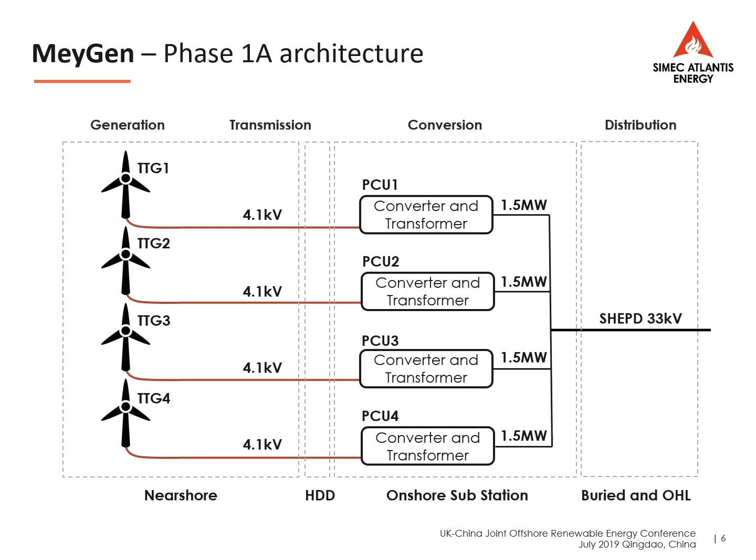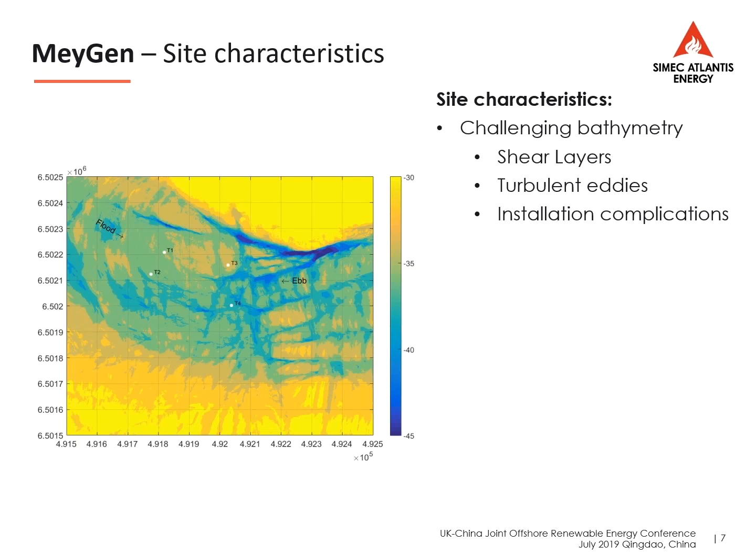The site characteristics are what they are. It's not the shallowest of sites. It's not the deepest of sites. We're in about 35, 40 meters. As you can see from that drawing on the screen there, the site topography is not just one nice flat sheet of rock, and so that certainly gave us challenges, but also challenges that have helped us develop ways of improving costs of all our equipment.

A better picture of the site really shows you. I think this one on the slide you can see now is nice for me to see, because we've had a lot of experience with cables out there. When we started this, there was a lot of talk in the industry around cable stability.

And obviously most tidal sites in the world are founded on rock or very stiff ground, because anything that's fairly loose gets scoured away. So therefore the traditional methods for wind farms and other cable laying, where you would trench cables, is not impossible, but certainly economically difficult.

And so what we've learned at MeyGen, we spent a significant amount of money on modelling drag forces, turbulent eddies, all that sort of stuff. At the end of the day, the lesson's always the same, that doing equals a lot more than modelling.

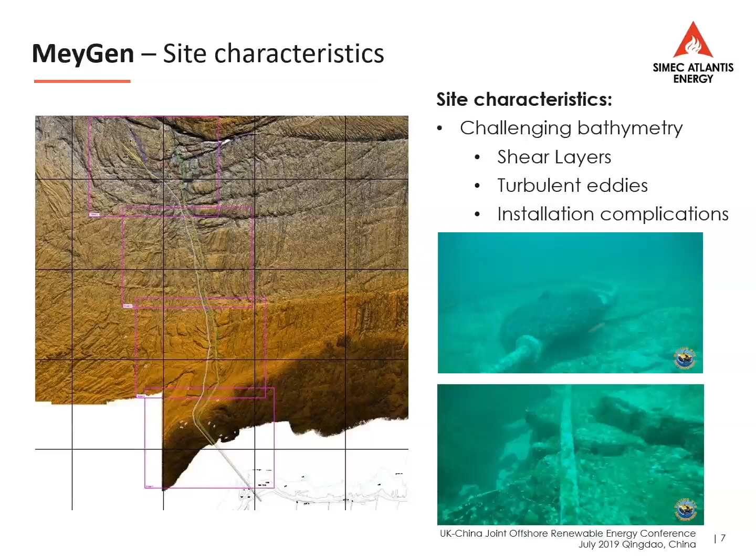You can't do it without modelling, of course, but by going out there and laying these cables, and particularly with the turbines that have cable tails, the Hammerfest turbines, we've learned what cables like to do and don't like to do out there, and some of the things we used to worry about that were major cost drivers in our models are not anymore, and that's great news. Happy to take questions on that in detail later.

The MeyGen site characteristics: again, we're onshore grid, fairly basic, normal substation setup, converters onshore. A lot of time and money went into the permitting of that building, so that it was aesthetically pleasing to the environment up there. And that is one of the draw cards of tidal, that largely the site is the same when you left as when you arrived.

I think one of the key things that we've learned at MeyGen, and we've been doing this for over 10 years now, and it's one of the cornerstones of my business, is understanding the marine environment. We all know it's difficult. We all know that there's different ways of approaching it. But what we've learned, again, by doing, is it's got to be treated with respect, but it's not as impossible as some people like to tell you. And it's driven innovative and clever ways of dealing with it.

We can now install a turbine in well under 60 minutes. We can do more than one turbine on a deck. All these sorts of things were not seen as possible, and if I put them in my financial modelling 5 years ago, it would have been questioned. We've now done it, and I think that's really important.

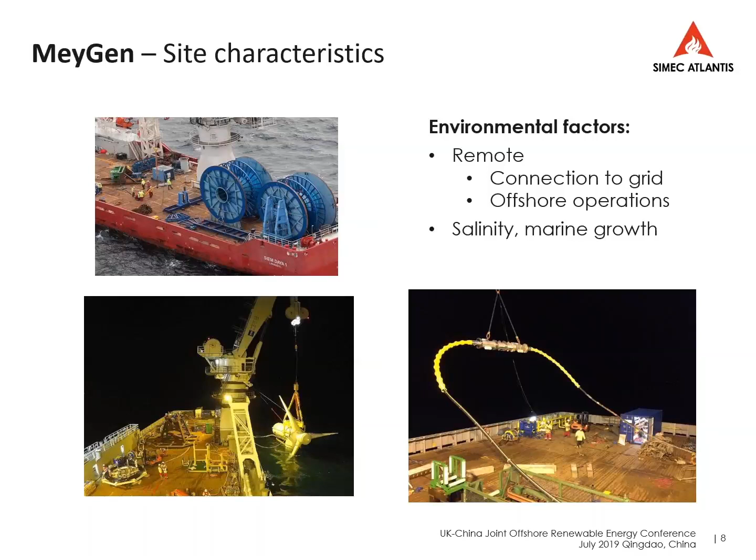The other thing too is, there's a great picture there on the screen of 2 turbines being serviced. They can be serviced on the back of the deck. We did that last year. And you can see a fresh one going in and one that's come out for a checkup.

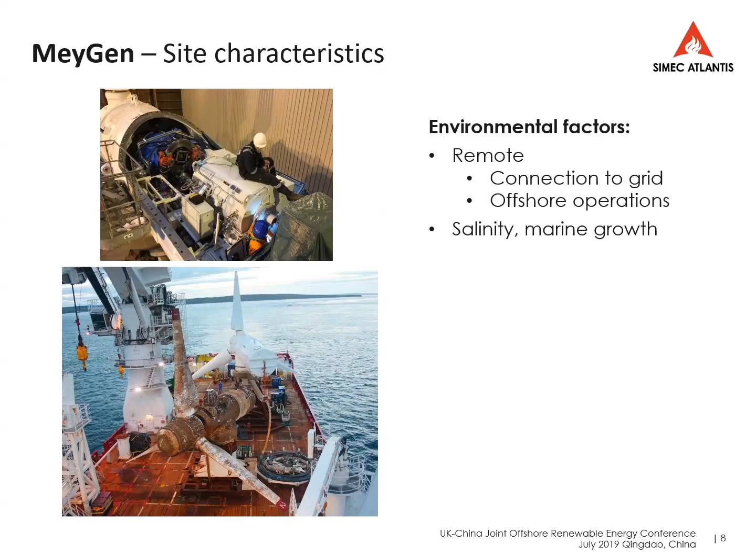And I think on that day we basically serviced 3 turbines in a 5-day period, and had to take one back to the beach, but the other 2 were, a world first, out of the water, serviced on the back of a deck and back in the water within 36 hours. So this again was not seen as necessarily possible 5 years ago.

So, one of the key things going forward in the roadmap is that through that long and expensive learning process, we certainly know how to do it faster. You've got stakeholder engagement, lessons learned, all that good stuff that allows you to get the confidence in your backers to get on with things.

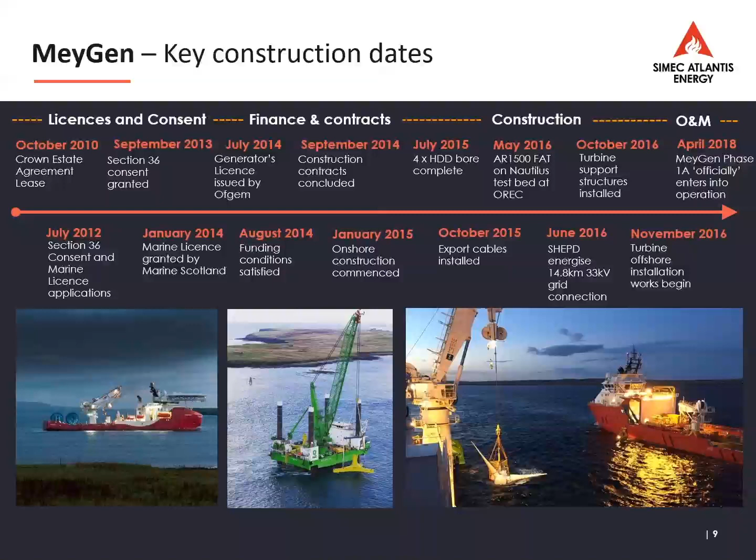But I think when you look at the industry and where it's going, you start collectively adding the achievements of our other colleagues and competitors. It's building on that story. The industry needs to see gigawatt hours, low maintenance cycles, improving maintenance cycles as you see on the screen. It's certainly improving, all driving to a lower cost of energy.

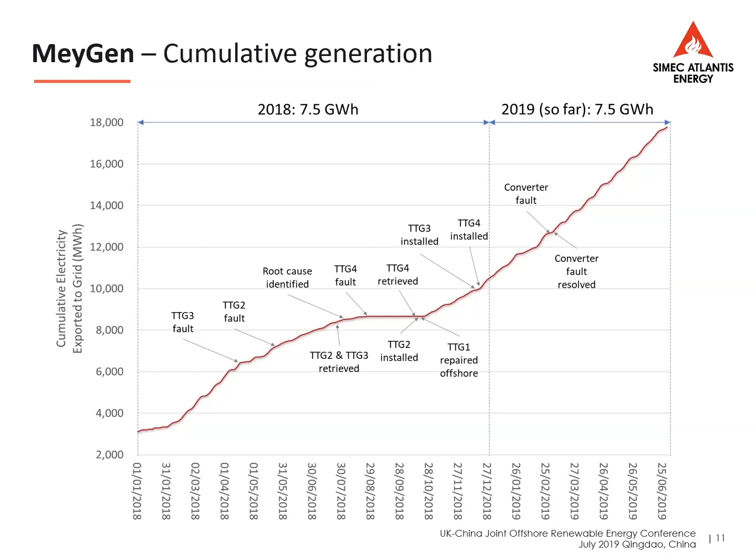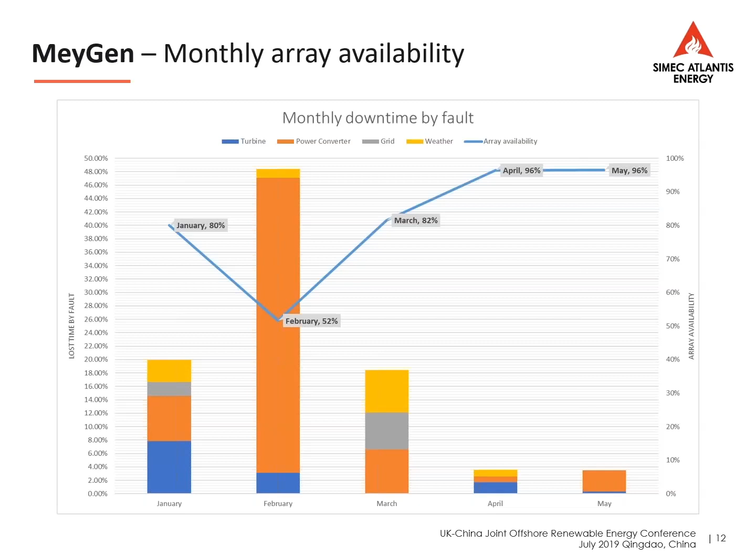I think the other thing that speaks volumes too is the percentage of time availability over the end of the construction period. You can see there, it ranged from 52% as a worst case this past year up to nearly 97%, and the latest figures have got closer to 98%. That is huge and unexpected in probably some of the cynical circles around Tidal. Getting that availability up and proving these devices can be reliable and continue to perform subsea is critical to investor confidence.

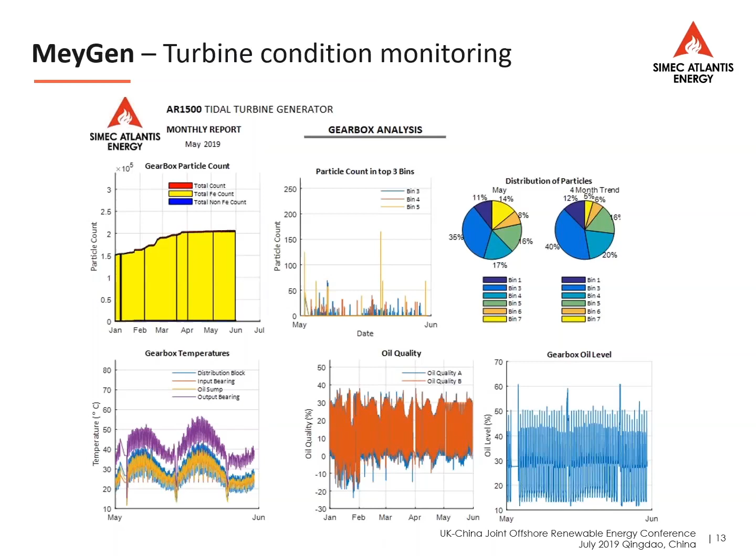I think this last slide on MeyGen itself, I just love it. It's a gigawatt hour in a lunar month. It wasn't a preordained landmark, but it's one we're quite proud of.

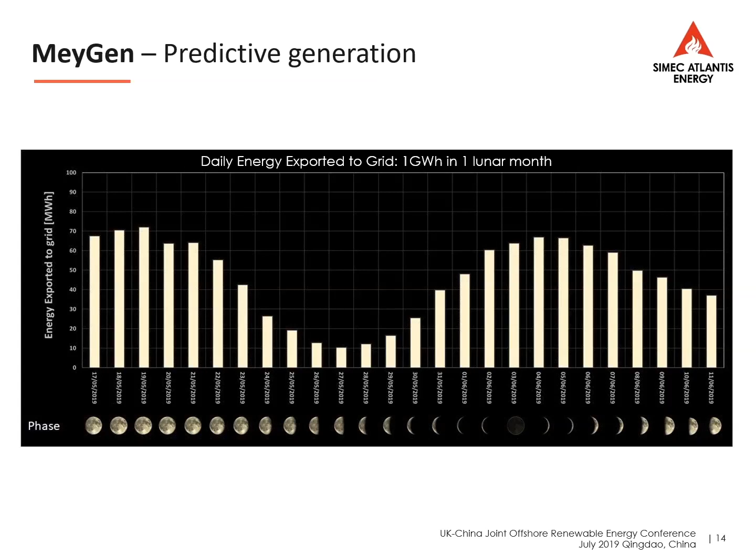Just to close this short presentation, we are constantly looking at the key to all this, and that's reduced levelised cost of energy, getting to a parity price, being able to compete across various platforms. It has to happen, and the question in most people's mind is not how, but when. It's time, and obviously how is important.

From our perspective, with our ongoing subsea technology as opposed to other means of deploying, we are building on our success with installation. As I said, being able to wet mate, install these turbines, not have to handle cables repetitively, and be able to return quickly to dock - probably during neap tides install up to 8 turbines a day. It's not unfeasible, and has reduced offshore handling costs to very low levels.

We're also looking at multiple turbines through one export cable, which has been done in wind, and we're currently working with our partner GE on that. These have a huge bearing on our cost models for future arrays. And that's the last slide.

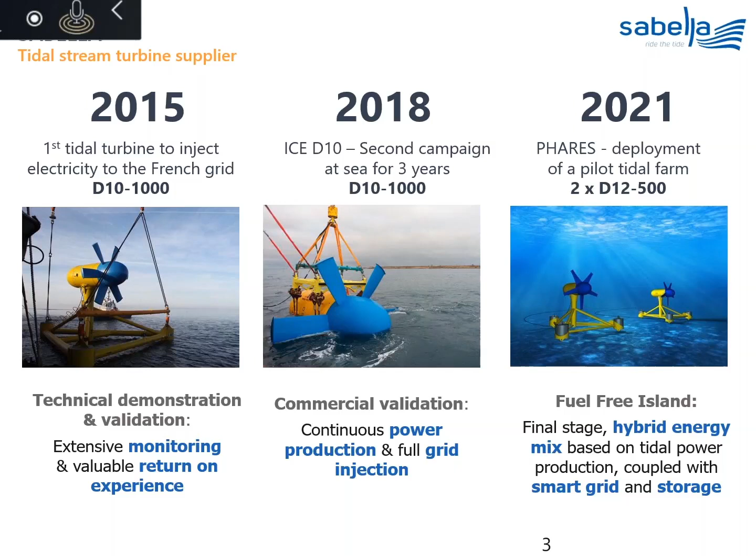So this is a snapshot of what the PHARES project will be for Ushant Island. It's not only a tidal project, it's a multi-energy project that aims to integrate 75% renewable energy into Ushant Island, which is for now 100% fossil fuel powered. The project will see the installation of 1 wind turbine of 900 kilowatts, 500 kilowatts of solar energy with innovative solutions like greenhouses, containers, floating solar and solar tiles, and 2 tidal turbines installed nearly as close as where D10 is today. The entire system will be coupled with an energy storage system provided by EDF.

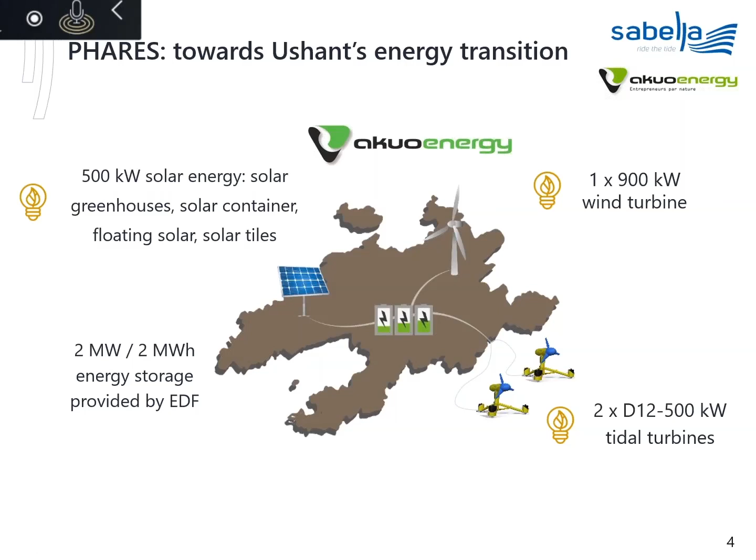The goal of this project for both Akuo Energy and Sabella is really to showcase the fuel-free islands energy model. We are not only promoting tidal energy as a solution, but a full range of different and complementary renewable energy sources that will allow production over there. We are not reaching 100% of Ushant's energy needs with this mix, but the goal is not to integrate more renewable sources just to increase production, it's more to shift the energy consumption of the inhabitants to make it in phase with the energy production. So it's more work to do with the inhabitants than just integrating more electricity sources.

The commissioning of this project is expected for 2023, so in 4 years. No, 3 years now, we're almost in 2020.

The period of operation of the project will be 20 years, and the main goal is to decrease the cost of energy production on the Ushant Islands area. So far the diesel generators are producing at a cost of 450 euros per megawatt hour, and the PHARES project with the multi-energy system will allow us to reach an LCOE of 250 euros, which is far better.

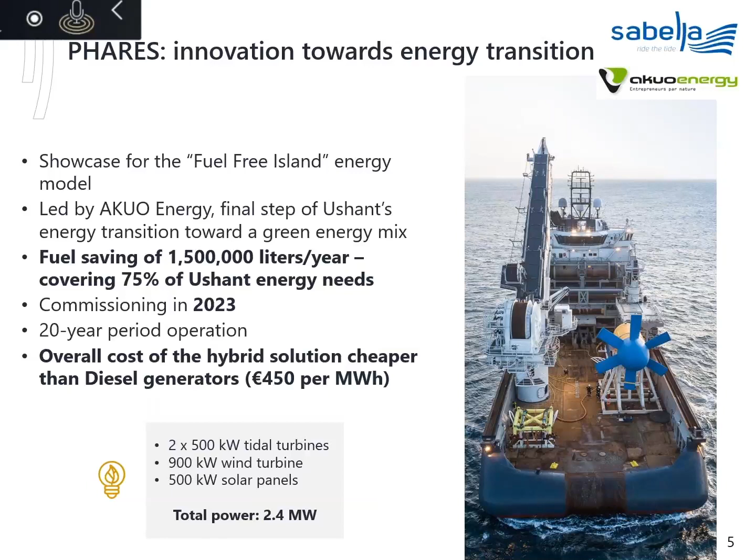The PHARES project will, of course, allow Sabella to move forward with our technology. We are not going to install exactly the same devices; there will be some major differences to improve the efficiency of the devices.

For the scope of the tidal pilot farm, it will be 2 D12 500 tidal turbines, meaning their rotor diameter will be 12 meters and they will have a power capacity of 500 kilowatts. We will still have the embedded electrical chain. It's a choice Sabella has made to prepare for a future bigger commercial farm that will integrate many devices, connected to what we call a subsea hub that will mutualize the power from all the turbines to allow one unique export cable to shore instead of one cable per turbine.

But for this project, we will have one export cable per turbine going to shore. It's not a difficulty here because we are quite close to the shore, approximately 2 kilometers away. So it's much easier to do one cable per turbine than to make a subsea hub for only 2 turbines.

The devices will still be on the seabed, held in position with the help of a gravity-based foundation structure that will be ballasted. We are still dealing with the modular architecture that will ease offshore operations, meaning the gravity-based foundation will remain on the seabed for the 20-year lifetime. If we do maintenance, we will only retrieve the upper parts of the device, just the rotor and the nacelle.

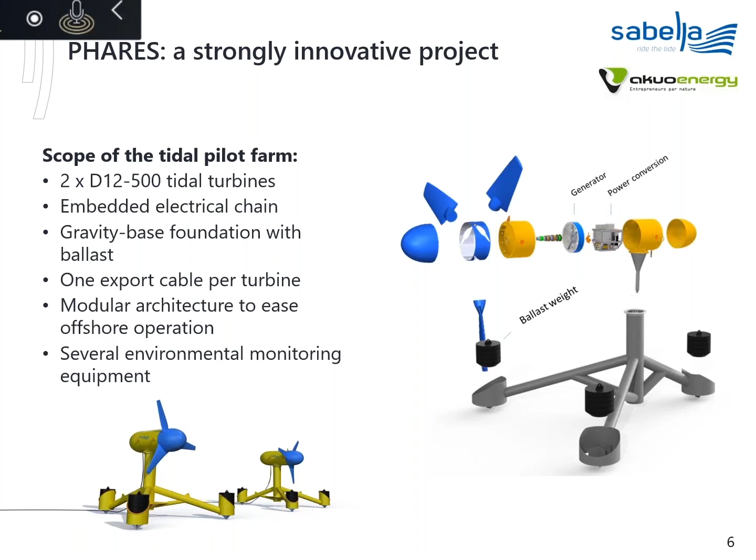To finish, there will be several environmental monitoring equipments, either on the turbine or around the turbines, to deal with monitoring of the environment and subsea life, which is mandatory for this kind of project.

The final goal of this fuel-free island model is really to see how we can replicate this project in other areas of the world. There is high potential for equivalent multi-energy renewable projects in the Philippines, where many islands don't have 24/7 access to electricity. Same for Australia, where you have off-grid communities far in the north, and even Indonesia, with a lot of islands. There are many areas in the world with off-grid communities in need of a new energy transition towards renewables. So this is the market Sabella is focusing on today, the off-grid areas market, similar to Ushant Islands.

And that's all for me. I hope it was almost clear. Thank you very much for your attention.